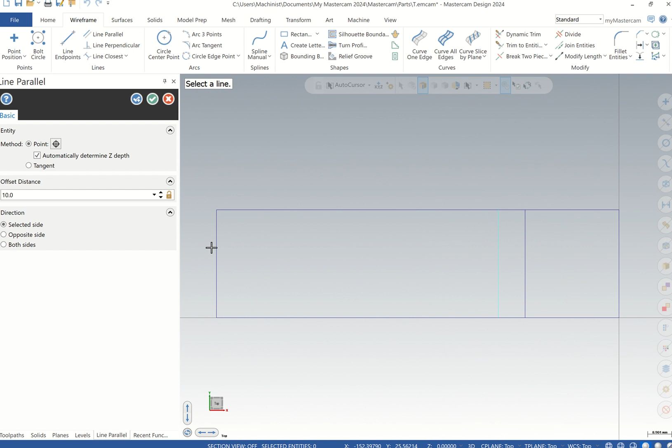Do an offset from here. Maybe we have like 5. It can be 10. This one can be 40. And this one can be 80. This one can be something like 16. This one can be like...

Offset this. Added 2 lines. Yeah. So this can be like 56 stroke 2.

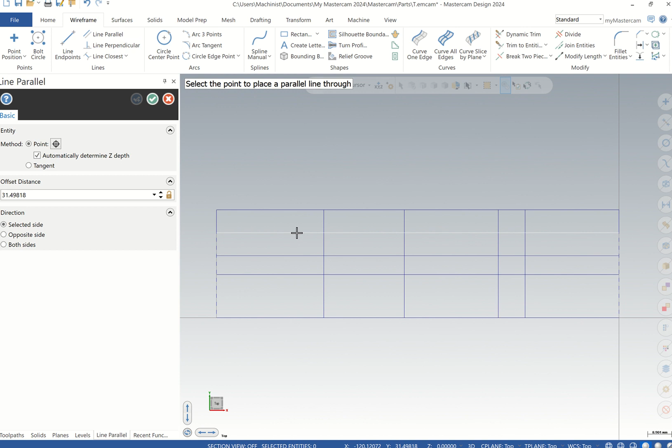This can be like 3, yes, 3. Okay, and take a line, join this line and this one. Okay, set again this, and this to this, and this one 20, 60.

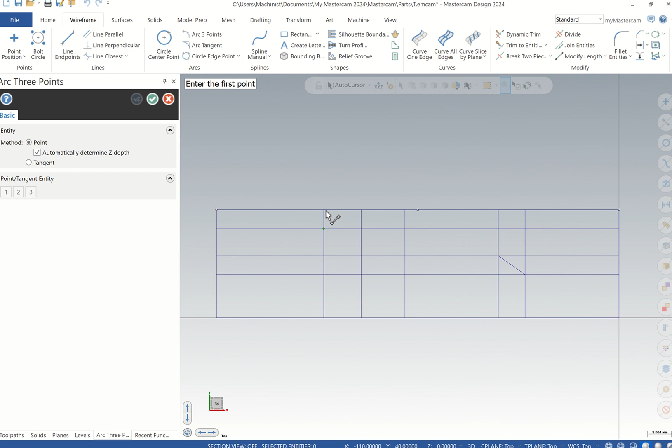Okay, and take 3 point arc from this point to this point, and then goes 3 point arc. This point here, 3 point arc. From this point to this point, we need to go to this side.

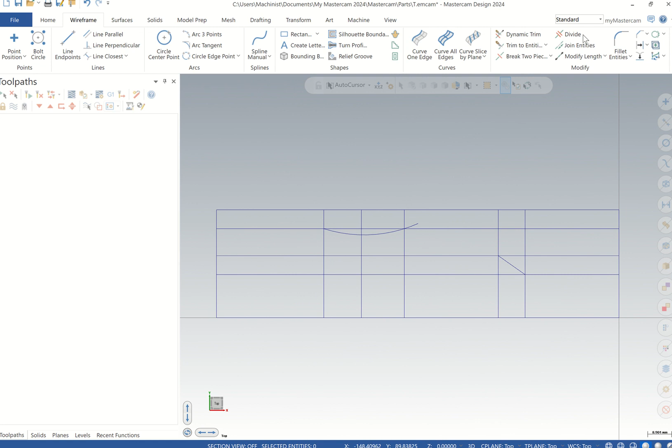Okay, you can trim this. This one you don't want it as final. This it goes straight. It comes inside here. It goes up. So we have such a simple part.

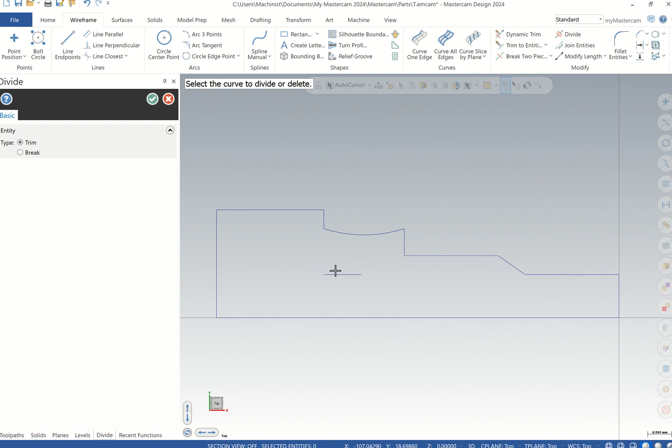So you can remove this. Okay, cut a fillet. Let's say it is a 15. This one is too much. It looks like 5. This, then this,

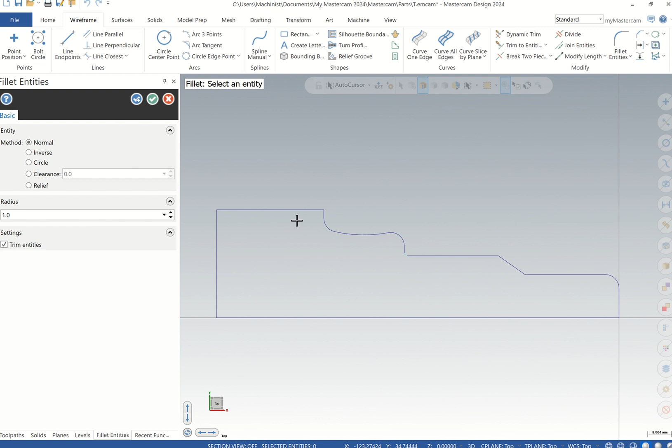Then here, then add another one like 1 on this side. This side, don't remove sharp edges. Okay, so we can use this.

Simple turning. Then yeah, we can use this profile to do turning, or we can create, yeah, let's use this profile.

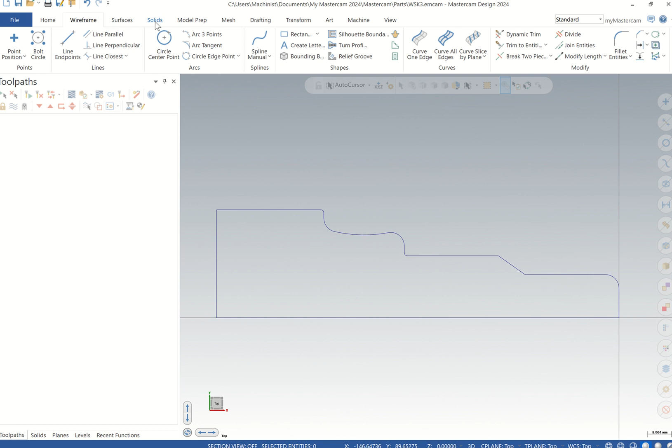Oh, if you want to use a profile for turning, it's okay, but let's convert to solid. Maybe you can revolve. Show you how to convert to a solid.

Okay, then you click on this. Okay, you can say isometric. This is the part. Yes, now this is the part. So the way it is now, we can use this part to program.

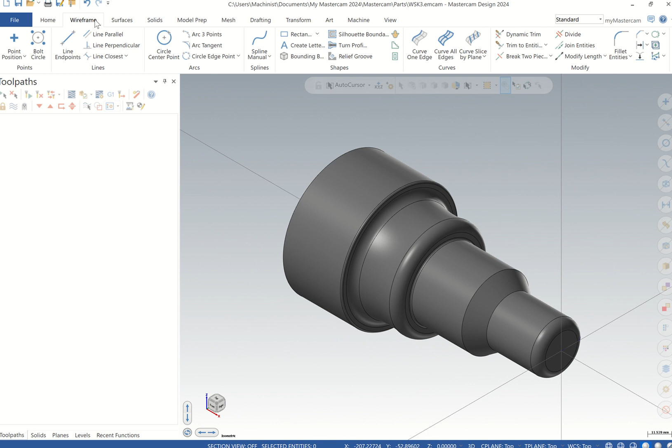And now you can come to wireframe, then you create a profile. So we say turn profile. You click on the part, enter. Then you say when this is our profile or lower profile, so we can use full profile. Okay, so this is the profile that we'll be using.

So we have done our modeling from the wireframe to 3D model. Then from there, we can go to turning. So first of all, come to toolpaths. So this is what our toolpath is. You can click on machine.

Which machine do you want to use. So you can use lathe, so you can say default machine, tool parties here, then you can expand on properties, then tool

Setting. We are using the cutting parameter of the tool, of the cutting parameter from the tool. You can assign program 1, then we can say that the tool will be saving sequentially. If it was T1 D1 or T1 D2 or T1 D3, if you're using Siemens.

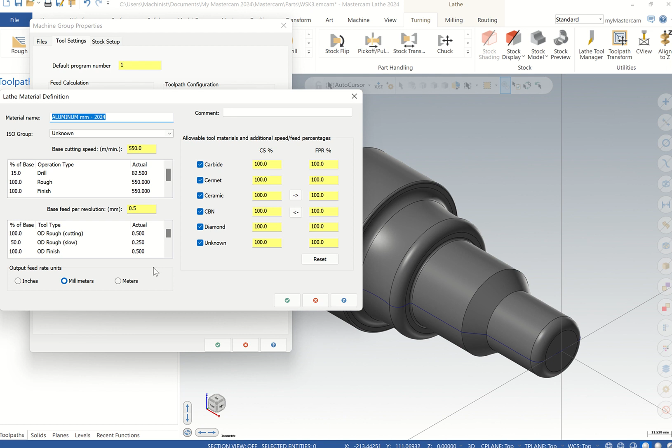If you're using other machines, Fanuc has, you can use T101, T102, T103, T104, T20 like that. But now for Siemens, it will be T1D. Good. The material is here. We can select the material, but I want to use the default material first of all. Then next session I'll show you how to add the material.

Then from here we come to setup. So we're using the left spindle properties. These properties, what is the OD? So we can click on this outer line, select OD.

From this outer line, can give us the OD. The total length was 150. Yes. Yes, that is 150. Then if you don't want to use that one, you can say use margin. What is the OD? The OD should be here. It was about 80. OD should be 80.

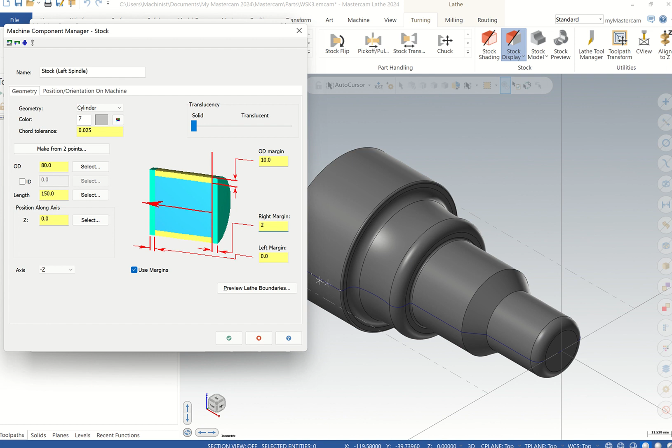Say preview. Then you can say let's say top plane. This is how it is. So this outer boundary is what is the stock.

This is the part you will machine. Then this gap from here to here is the 2 mm for facing. So you can go. You can say enter. Then we come back. Press enter. So we have selected, but our stock is cylinder.

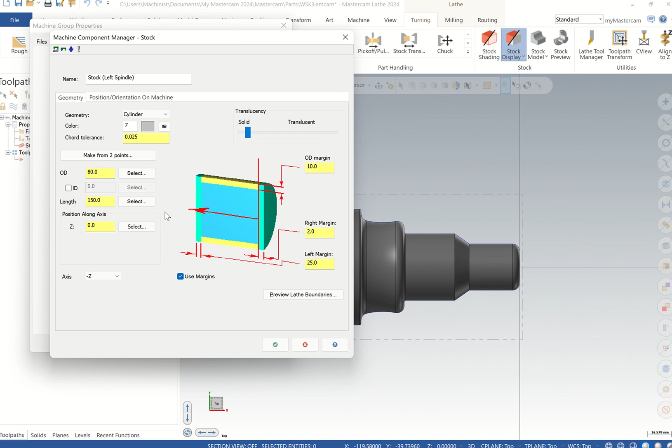So you're using a cylinder block. Yes, and then it's okay, click OK. We need to also click on where the jaws are. Then from the jaws, next you can say from the stock, you click on the parameters.

This one is the jaws. If you have different jaws, you can put the parameters here and it will update. But I want to leave it as default. So you come to parameters.

Then from these parameters, you can say from the stock where you put in your jaws from this far end. You see it is red, so maybe it is 20, let's say a gap of 20. Then I can preview. You see now it is... this is the jaws, let me put it to top plane.

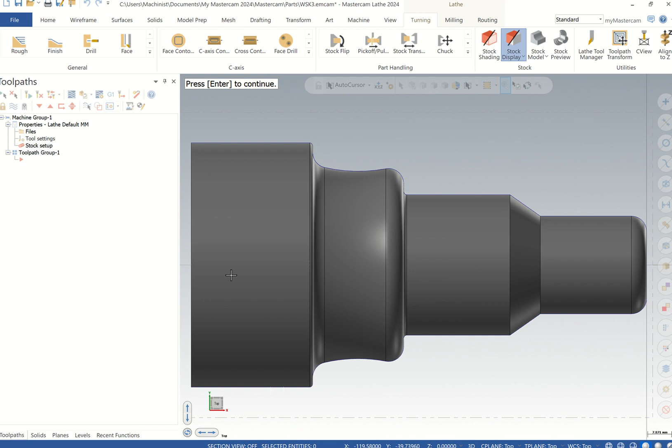Then I fit it so you can view it well. You see, this is the part, this is the jaws, this is the stock, this is where it has clamped.

Or else, one way, I can also say use grip on the maximum diameter so that it doesn't give an allowance. Then I can say preview. You see it has now gripped, it has gripped on the largest diameter. This is the largest diameter of the stock.

Click enter, so everything is okay. If you want to change the reference point of this jaws, you click on reference point, and you can say you're holding from here, from this side to this side. So it's upon you to set it.

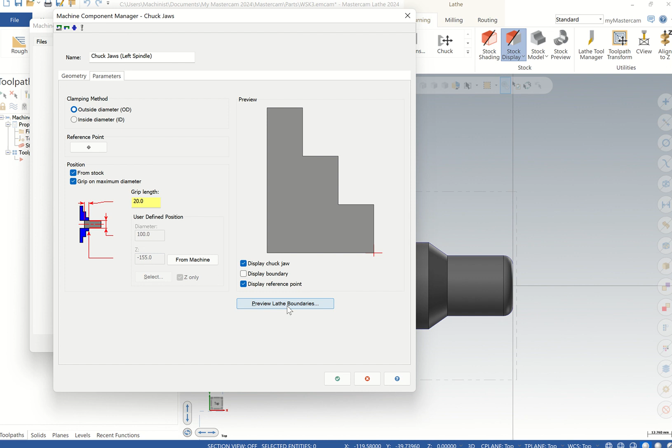Okay, then we're using the left stock. Yeah, so we're not using right stock. I think these others are okay, and you can fit it to the boundaries. Yes, then okay, say okay. So we have done our setup.

The same setup you do on CAM may depend on either SolidCAM, Mastercam, Fusion 360, InventorCAM, EdgeCAM, or ArtCAM. Whatever you set on the CAM, you need also to set on the machine, meaning our origin in the machine will be here, this will be our left jaws. If you're using the right jaws, will be this side, but if you're using left jaw, that's left spindle.

So we have done our setup. Now I want to do what we call facing. We go to facing, we go to roughing, then we go to finishing. But basically, this topic is about creating a simple model, then programming it. But if you want to know about tools, the next session will discuss how we can create the codes for tools, then we use it for programming.

So everything is okay here. You come to facing, our operation is here. You click on facing, it will open up. Then we are using this deep tool.

Number one, you can change the maximum speed. Our machine is 2000, it's limited, that is the maximum speed you can go. Then you can say you're using the 1200. Then this one can be like 400. I'm just doing a rough value so that you know when you're cutting it, you don't change.

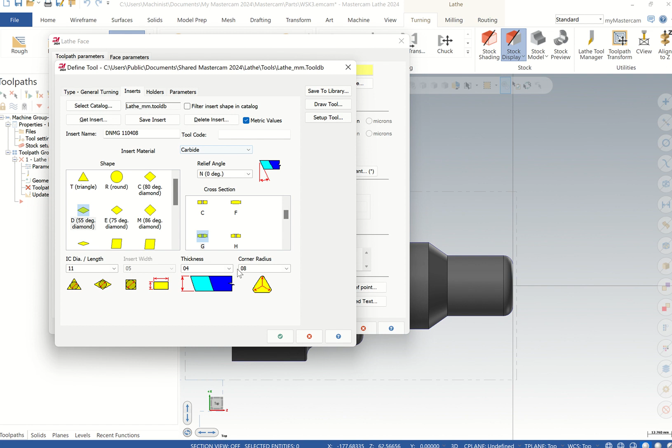Then whatever is here, it will be taken the way it is. Then okay, from the tool, it has updated the tool.

Then I can say, because I've put the part now, come to face operations. Let's say my composition is off, left, maximum, whatever it's doing material, so we leave it. This is the entry where the tool is coming from. Then finishing step over at the end of it. Then once it goes out, the retraction from each cutting, and whatever is okay here.

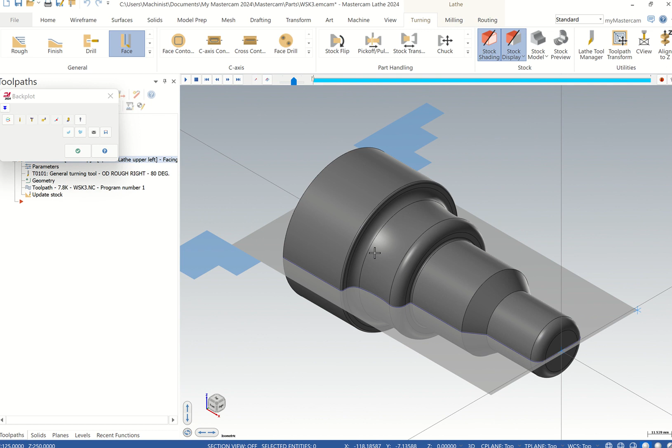Let's say use isometric. Let's choose the top plane because isometric is not put in 3D, the top plane. Then you can minimize, then you can click here, play.

Speed is okay, play. So you can see it will be coming from some far away, that is X125, then it goes Z250 and put it far away. That's the facing, we just put small till so that we need to only once it goes away. Good.

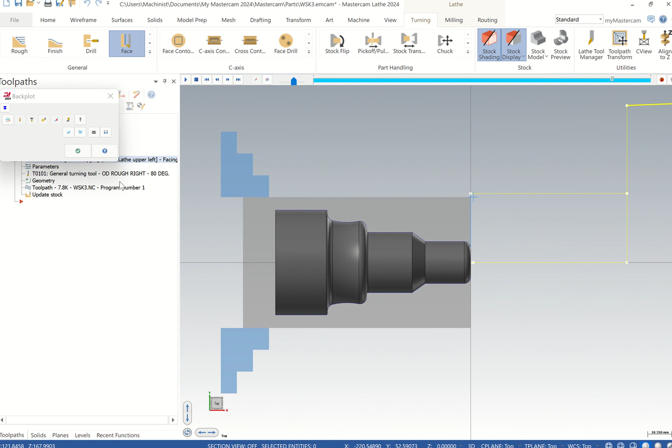If you find this one, you want to cut many of them, I can also change these parameters, number of passes, all of them. Let's say it is 0.5, 0.2 - I think 0.2 is okay, but it's too small.

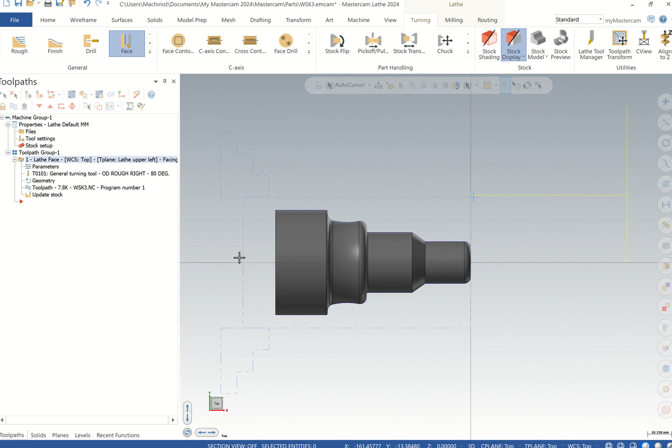Okay, then I want to add what you call the rough turning. Rough turning, I'm using the same tool. So my rough turning, I will pick the profile here. Then it has already taken me where I want.

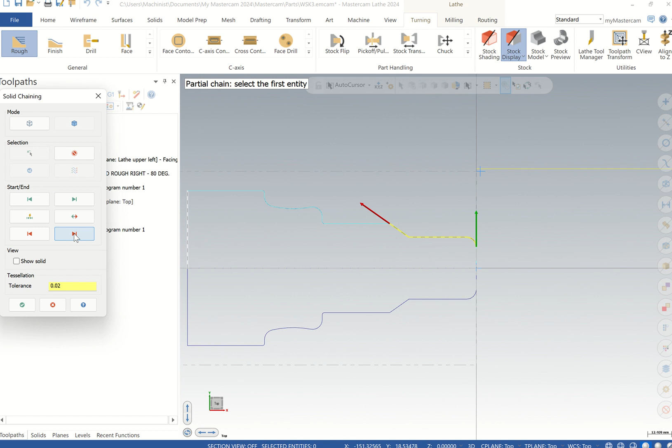I can use these shortcuts to forward it. Then it goes next, or I can create this, say forward this, forward this, forward this. It goes. Yes, yeah, good.

Then I'm using the same, let me use the same tool for roughing, then I will change another tool for finishing. Coolant - if you want to put on coolant, the same way you can change here, coolant.

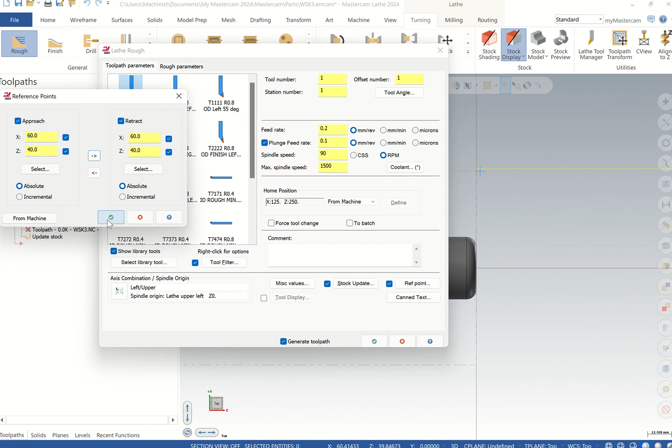Reference point, maybe let me pick a reference point, select it, let me put it close so it doesn't go far away. Then I can also put it either way, let's say 60 by 40 so that you can update. Okay, and I'm using absolute. So the same tool, roughing.

Good, so here I can write roughing. But remember this external turn, so it can be OD, outside diameter. Reference point, good, okay. Rough parameters, I can say it's no compensation here.

I can put it all in computer, or then depth of cut, let me put 0.5, stock to leave. Let it be leave a small material along x-axis and z-axis. Percentage for this, let it be what it is. If I can change the angle here, but the angle is okay.

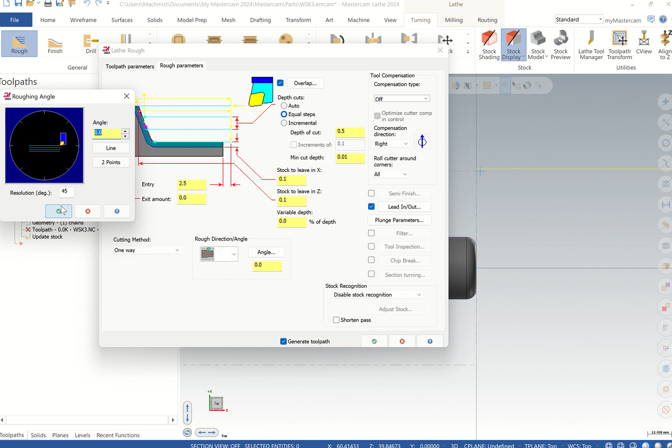This is how it's approaching. It is approaching, it's okay. Entry is far away by 2.5 millimeters, so it's safe. Then also it goes away. If I want to extend this, I can also extend by 1 millimeter so that it leaves.

But sometimes it's good, sometimes it's not good, depending on the condition of the operator, yeah, and the material, and even the jaws. If you don't have the security with the jaws, you don't need to put too much here because it will crash your jaws. And unless you're so keen in observing the sequencing of the operation and even the safety.

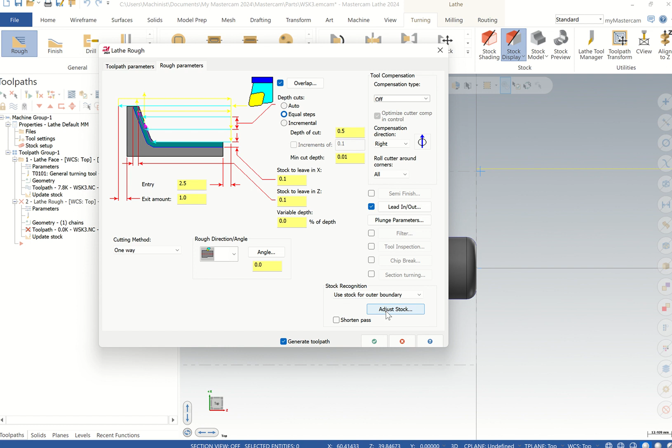You can come here, then we say, can we do a simulation? We see how it looks like here. Do a simulation.

Approach here is 2.5 millimeter. Then away is also I've given 1 millimeter to extend the material. Yeah, so this is what we call turning, outside diameter turning using Mastercam. Then the material leaving here, it won't do finishing. So I'll put another tool for finishing.

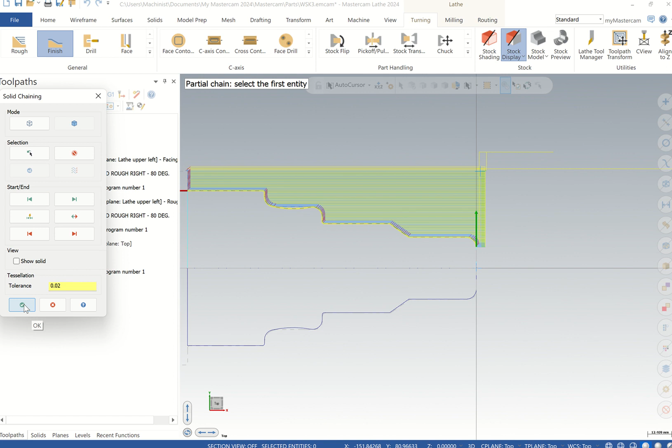Good, let's go to another finishing operation. Then I will basically let me pick the last, because already had the last profile. I can say pick the last profile, but again don't pick it, is it? Yeah, good, so you can click here, okay.

Then we go, let's change a small tool. Let me use this tool, and then I'll change the parameter here. So I can say this is, yeah, it is VNMG 160408.

Then the holder should be, let's use 20, so the holder should be MVJNR 2020K16. Then let me copy this holder.

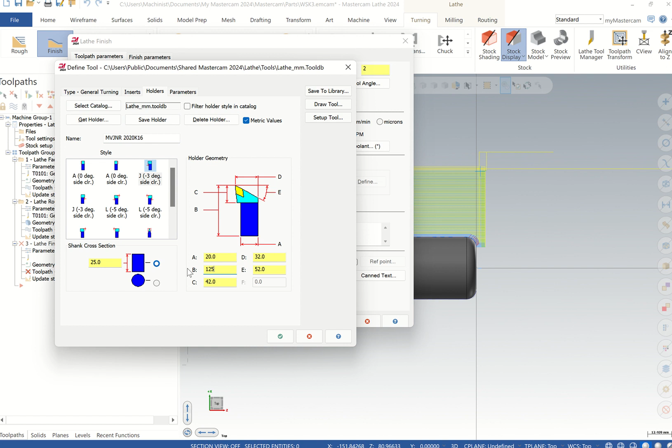Then I save the holder. And then this one I can say 125 is okay, 32 is okay. I'll put VNMG for finishing 160408. Then I can save the tool.

We save the tool so that next time I can use this tool. Pick a tool, then I can change here the speed. Let me use 2000, then can do like 1000.

Remember, I've just changed it, but it's not good to change this parameter unless you know the cutting parameters for each tool, so that you don't break the tool and don't affect the surface finish.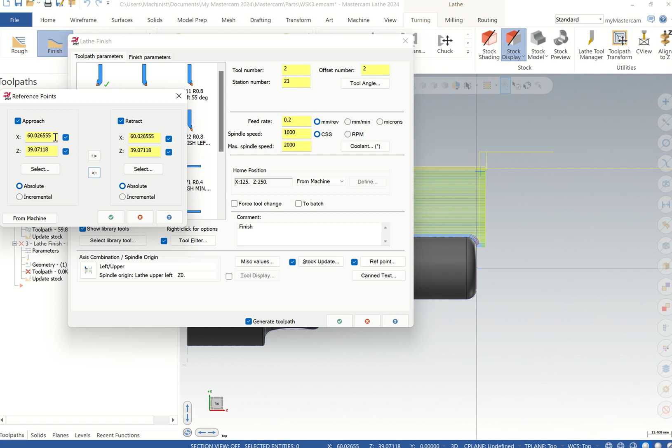That's okay. Reference, where is it coming from? Let me select a point, maybe. Let's assume it's coming from this point. I can copy both sides, 60 by 40, then copy the other side. Okay, let's go, what next?

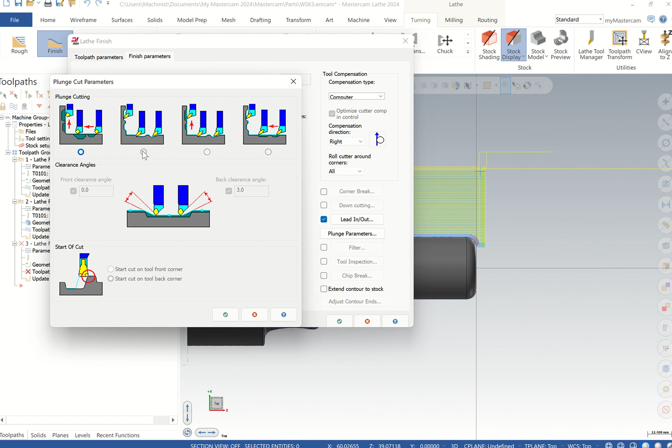Because somewhere, let's use this one. Okay, why? Because here it is curved, so I need to plunge inside to cut. You can say okay, yes.

Then I can do a simple simulation. Play here to come to do finishing. Yeah, now the tool for finishing. Good, I'll put 2 times, so it will go 2 times. Yes.

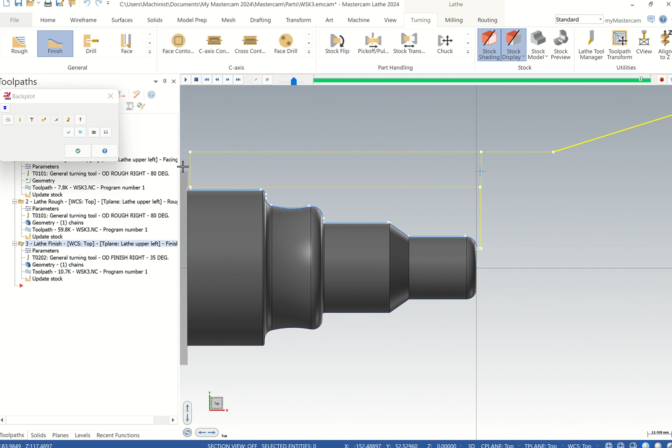Wonderful. So this is very simple part programming for Mastercam.

Then, lastly but not least, let's go to how we can generate a part program now. Let me select this and then we do a simulation of the whole of it. You can say this one is selected, you can use this.

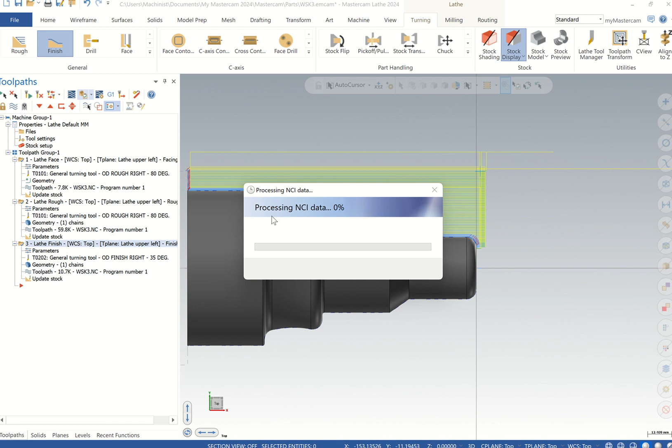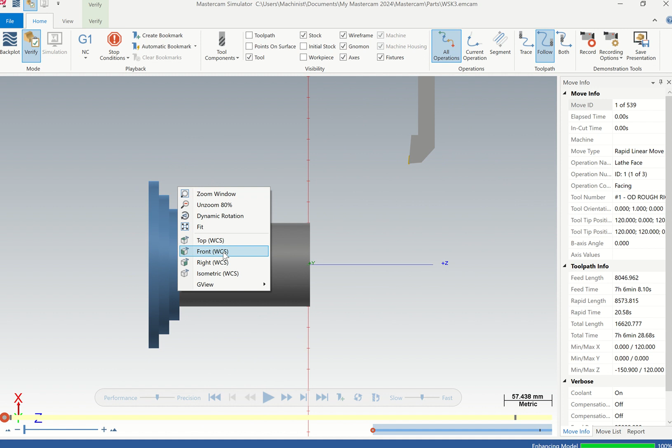Then you put it to fit to normal. Can put it even isometric. Let me put it isometric. I can put it top. Let me put it front. No, the top is good. Top is good. Isometric.

Now my mouse don't want to rotate. How comes my mouse don't want to rotate?

So let's show it to part stock, initial stock, workpiece. What can you trace again? Let's see this, then we can create here. Run.

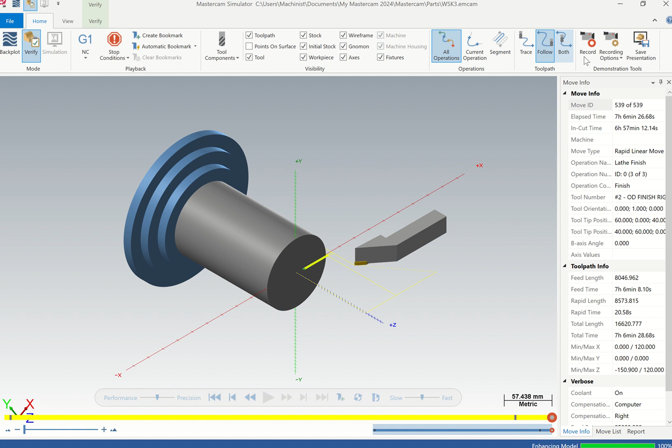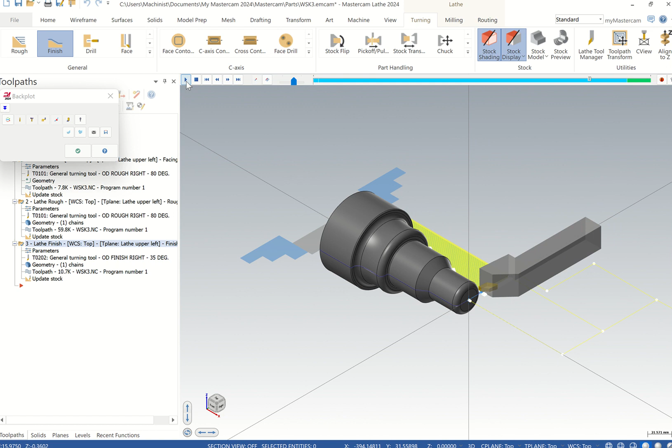Then it comes to finishing. We have to second tool. Yes, then finishing. Good, then let's generate a program.

Then we end our session today. So let me pick all of them. All of them are selected. You select this, then hold on Shift, then pick the last operation, then right click.

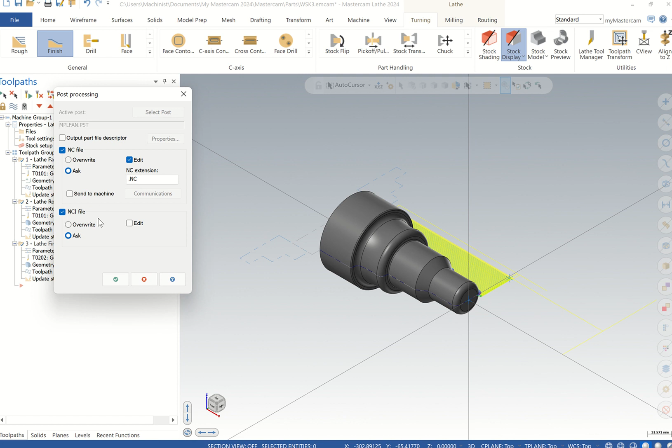It will ask you where to save. Let's say on this desktop. Then because my machine is Siemens, I'm using .mpf for Siemens. Then I'll say yes, the desktop. It will generate the program.

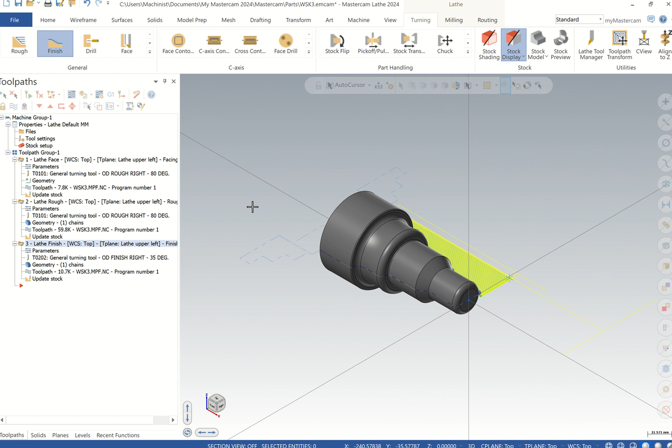Yes, so it's supposed to be the program. It's opening the code expert to post the program. Then they'll show you the part program and how to edit. So it has opened the code editor.

So this is the program, most cases on the machine like Fanuc GSK it gives you this, but for Siemens I'll ignore, and then I say I'm using G291. Yes, my safety G54, G00, G90. Then I can put a semicolon at the back when you're editing the program.

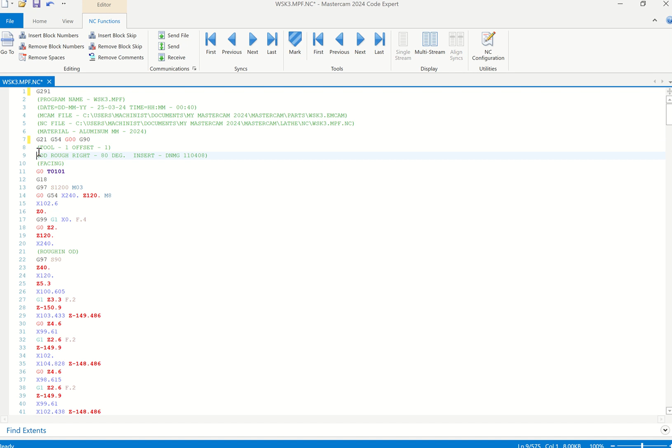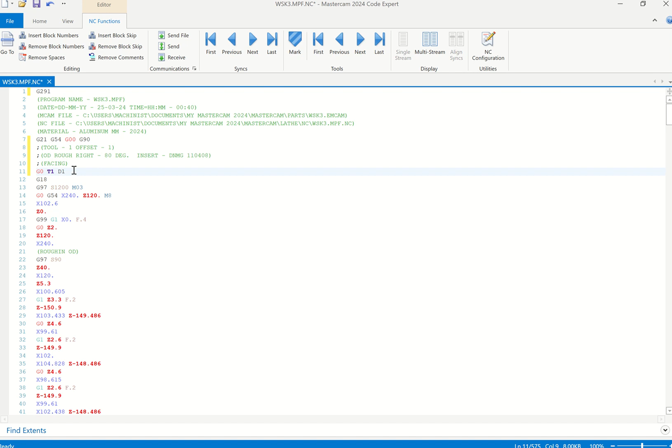My tool can say it is T1, D1, because I'm using Siemens. It is changing this, yes. That is, it is using two tools: tool for facing, tool for rough turning, then a new tool for finishing.

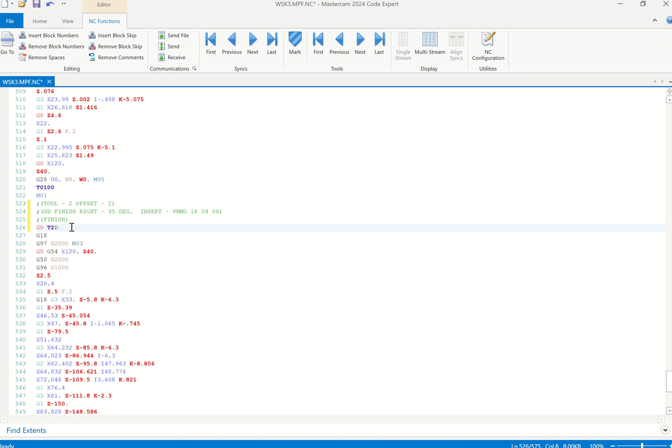DNMG 11 is for rough turning, so I can put here semicolon. So this is the second tool for finishing. T2 D1 offset 1, offset 1, so to change the tool, and I can now remove this G00.

Let me not go home because I'm continuing my jobs. So this is a simple part program, and you can now go to home, file, save as. If you want different versions, it is here, you can save different versions.

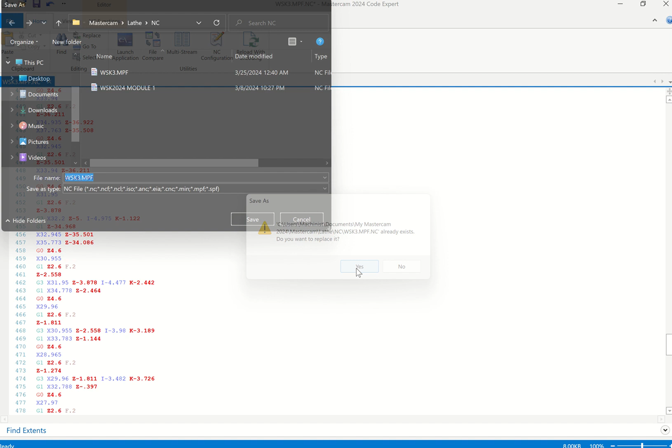Say yes. So this program you can put in a flash, transfer to your machine, then you do machining. But if you have all the configurations, any configurations you can update on your machine, you send the program to your machine, you pick the kind of machine you are using, maybe Siemens lathe, then you post it on your machine.

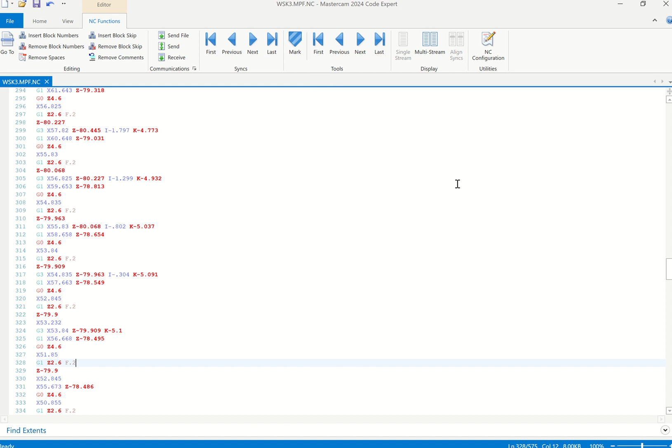Here in Kenya, it is almost, let me check, I think it's almost what? Yeah, it's almost 3 p.m. No, 3 a.m., yeah, 3 a.m. Good, thank you.